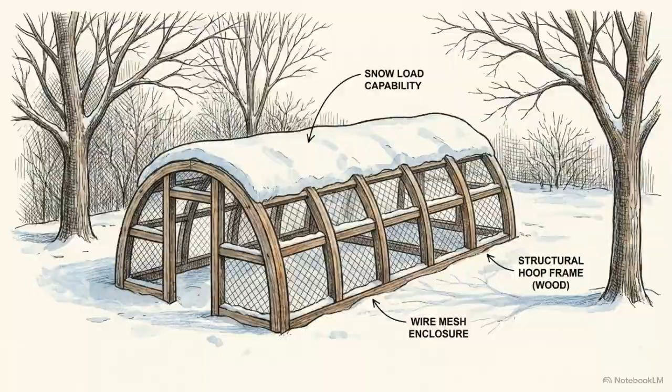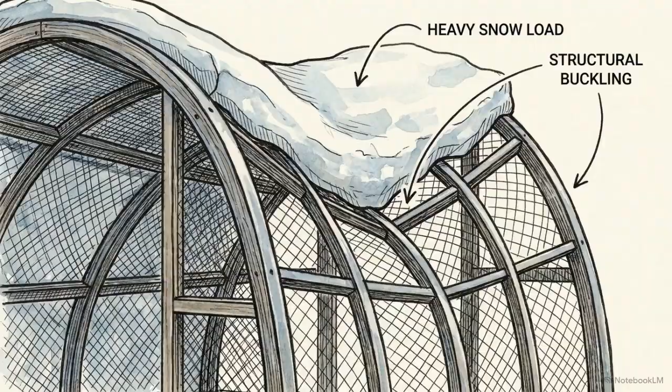Late winter in the Northeast can bring a specific kind of structural failure. When a layer of dense, wet snow settles onto heavy dead vines, it creates a crushing weight that can buckle the wire mesh and wooden hoops of a 20-foot chicken run. For a backyard flock, this isn't just a maintenance issue. A collapsed roof creates an immediate entry point for ground predators like foxes and coyotes, turning a secure night shelter into a liability.

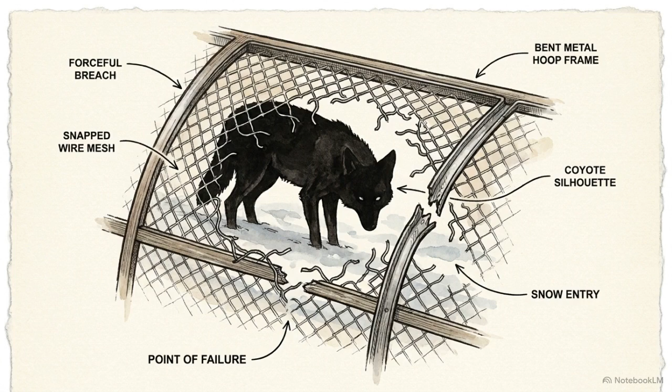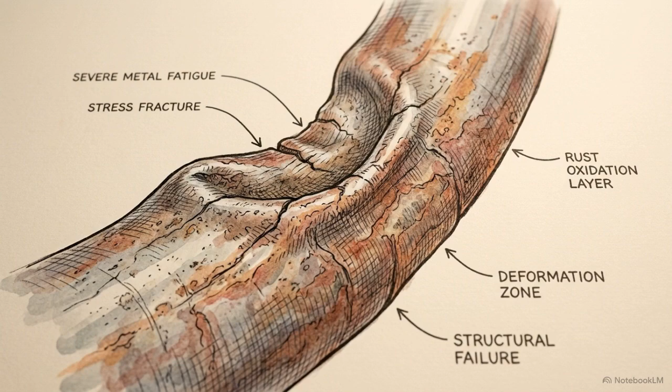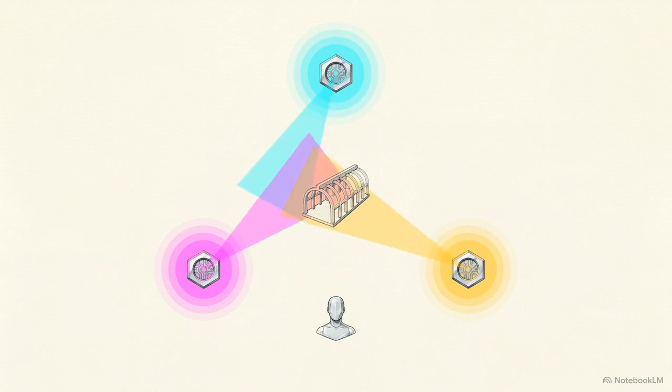Most people solve problems like this by treating AI as a digital oracle. They ask one question to one system, take the first answer provided, and assume the consultation is over. But restoring a 10-foot wide span of fatigued steel requires a more rigorous approach. The creator bypassed the single prompt habit and instead built a multi-model consultation team to cross-examine the structural failure from several angles. By treating a physical repair as a structured dataset, the project produced a transparent technical case study.

This methodical documentation eventually found an audience of over 1.5 million viewers, demonstrating a new way to integrate digital logic with manual labor. A visual survey captured the sagging hoops and improvised pallet tower.

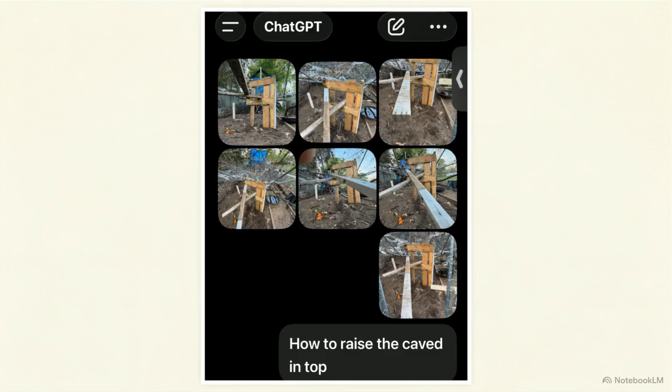These photos were fed to ChatGPT to identify weaknesses. It flagged the vertical tower, warning that without diagonal support, the column was prone to sudden lateral collapse.

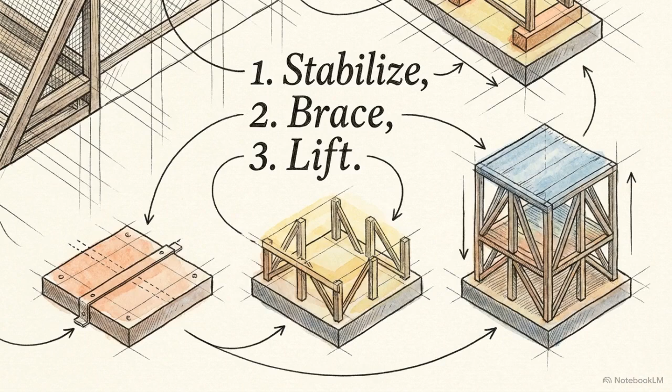This initial diagnosis was then passed to Gemini to compress the raw logic. Its task was to take the various safety warnings and distill them into a clean, prioritized framework for the rebuild.

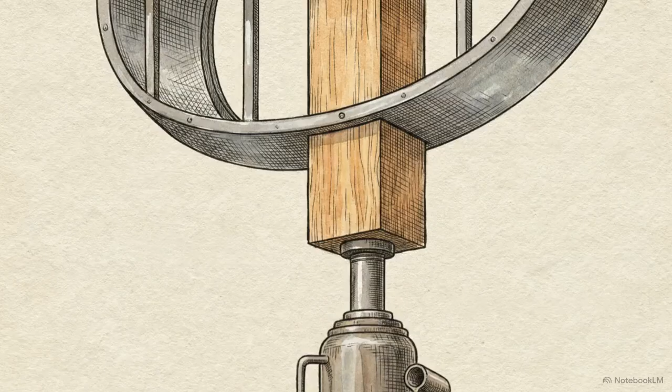The final prompt went to Grok, which was tasked with producing a field-ready execution guide. This provided a highly specific, step-by-step sequence for the physical lift, perfectly tailored to the exact materials on hand.

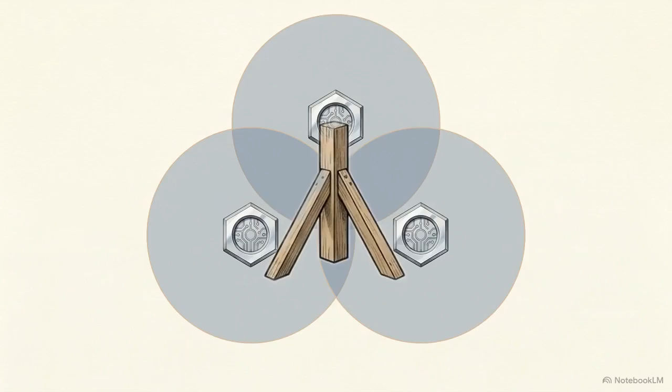All three systems reached a consensus on the first move. The foundation had to be locked. To prevent the tower from racking, diagonal cross-bracing was required to triangulate the support before any upward force was applied.

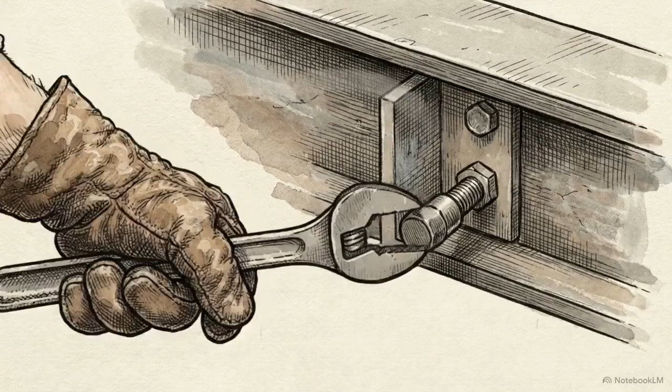This multimodal approach is a safety check against hallucinations. When three distinct systems converge on the same structural requirement, it provides a level of confidence that a single prompt simply cannot match.

To manage the lift without kinking the metal hoops, the panel recommended moving away from improvised levers. The technical solution involved steel jack stands or a small bottle jack to provide the controlled, incremental pressure needed for a fragile frame.

Instead of heading to a lumberyard, the creator audited the property's existing materials. This inventory showed stacks of weathered dimensional lumber and a substantial pile of brush and branches available for the rebuild.

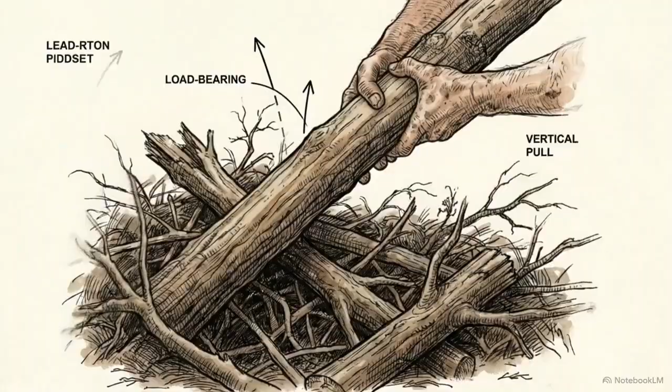They specifically selected a straight, thick branch from the brush pile to serve as a load-bearing ridge beam. By using a foraged material that already matched the length of the run, they created a permanent interior spine at zero cost.

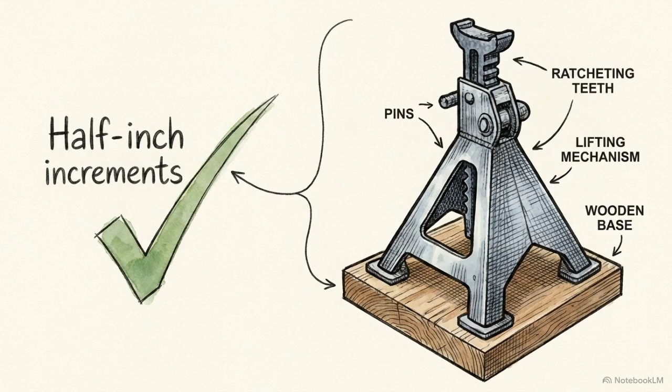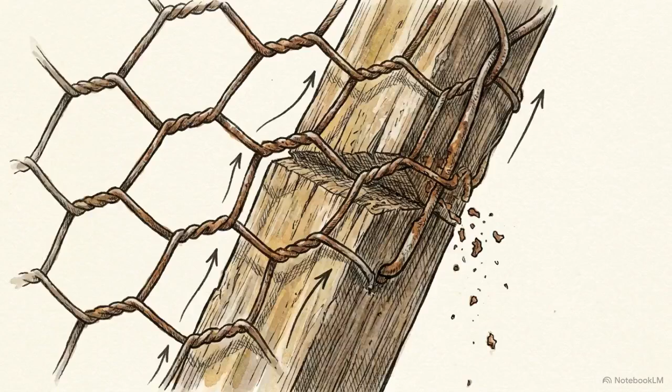The lift followed the AI panel's safety constraints exactly. Working in half-inch increments, they slowly raised the peak while monitoring the tension on the wire mesh to avoid kinking the fatigued metal. This process highlights a parallel between the physical and the digital.

Sourcing a branch from a brush pile is the manual equivalent of foraging across intelligence platforms to find the exact insight needed for the job.

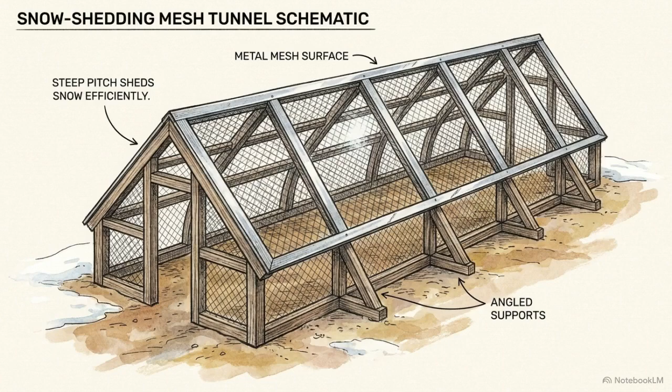The result is a structurally sound run with a new, steeper pitch designed to shed snow before it can accumulate. The fatigued hoops are no longer under tension. They are supported by the interior ridge beam.

This illustrates a repeatable methodology, the SDP cycle. Sense translates the environment into digital data. Document synthesizes that data through AI into a cross-checked plan. Publish is the simultaneous execution of physical repairs and distributing the technical documentation.

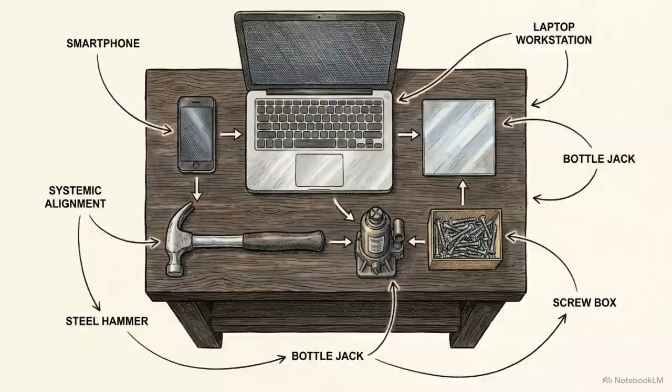These tools provide a framework for engaging more deeply with our physical surroundings. By using them to solve and share our projects, we increase our capacity to navigate and repair the real-world reality.